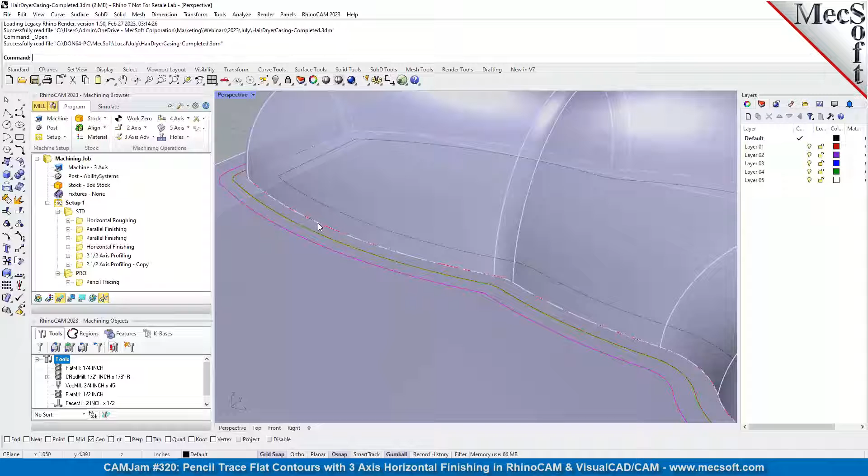What's interesting about this part is that I mentioned that there's going to be a fillet around the perimeter. And if you think about this, the body or the boss of the part, this tangent angle changes all the way around. So you can't just do, like, a profiling around there. That won't get all of the material.

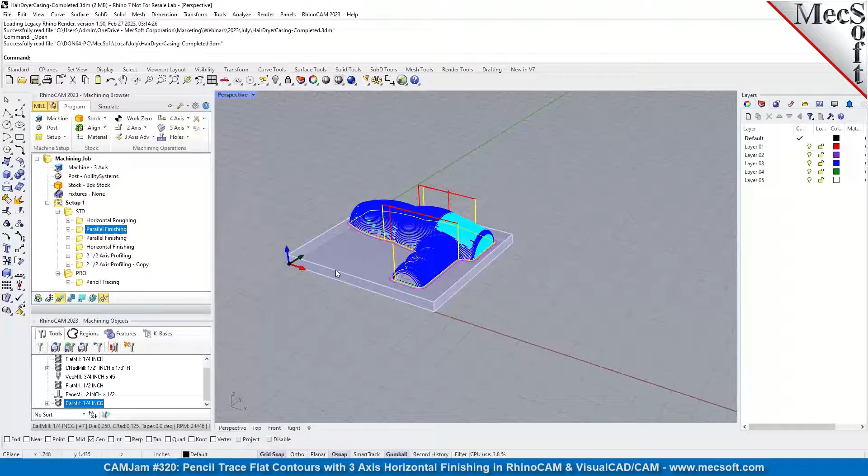And also I want to talk about these different offset values. So for our roughing operation, we just roughed the entire part. But for the parallel finishing, you'll see that we used this first perimeter curve, which is an offset.

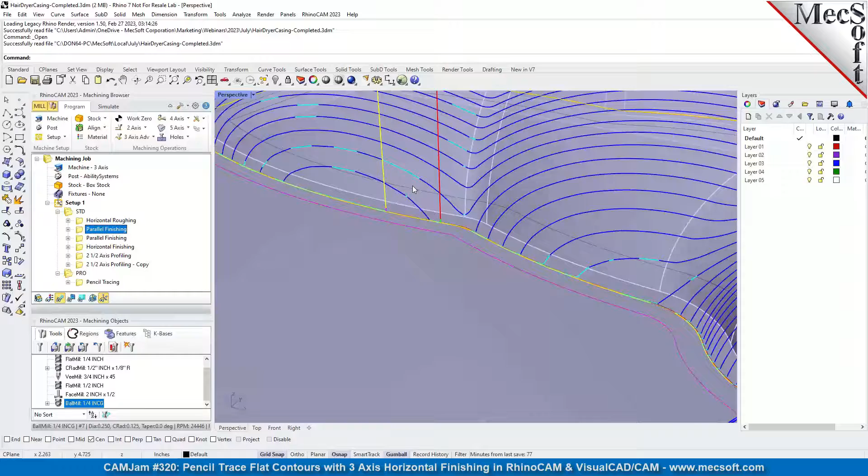Typically, when you're doing finishing and you want to contain it, offset your perimeter curve by 1/2 the tool diameter, which is basically the tool radius, and maybe a little bit more than that, in order to contain that tool path to that area. So we're coming all the way down,

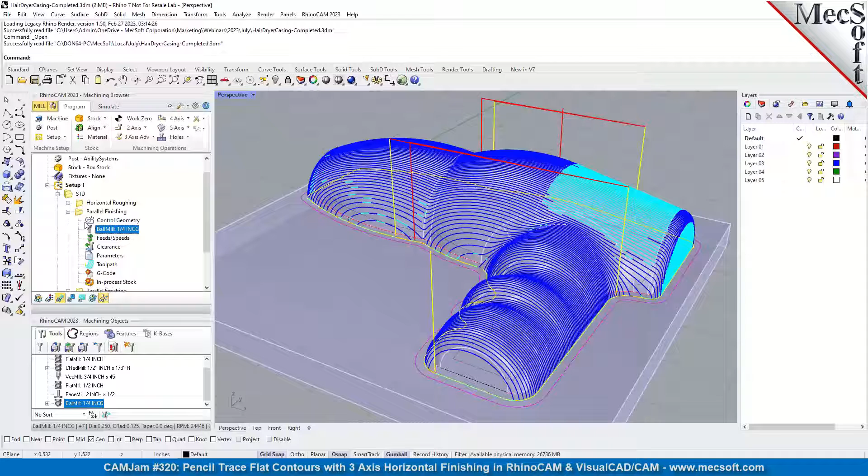and you'll see that the tool, which is a 1/4 inch ball mill, is going to leave a 1/8 inch radius wherever it cuts. So that's the first approach at cutting that radius. We did one going in the X direction, and we did one going in the Y direction.

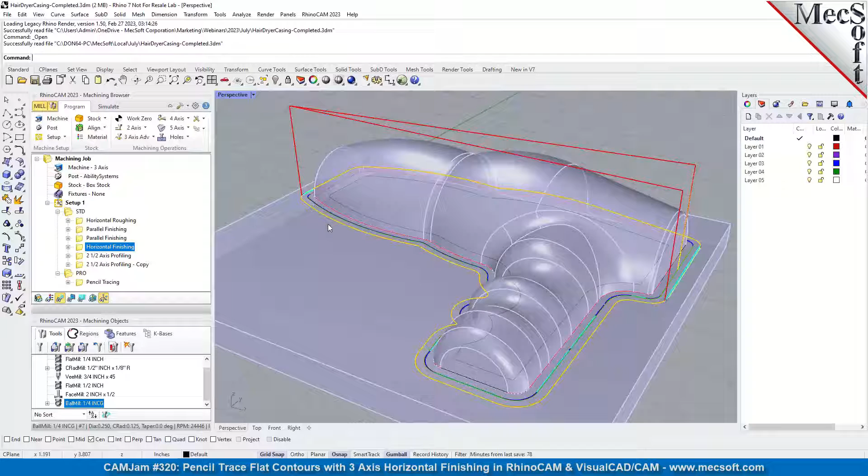Now, one way that you can do, which works well on this only because this is a completely flat area, is you can use horizontal finishing in order to create a path that's very similar to a pencil trace. So what we did, we selected the perimeter curve, okay? And then let's go ahead and look at the cut parameters.

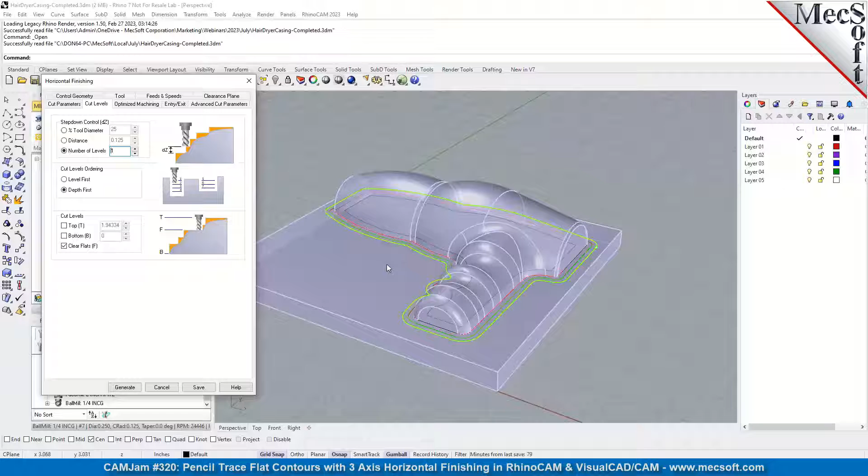All this is standard. The cut levels, we're setting the number of levels to 1, okay? Plus, we're forcing it to do a clear flats, which means it's going to put it right on the flat surface. So if it can only make 1 level and it's got to be on the flat surface, then you're getting the pencil trace, the perfect bitangent tool path around the edge.

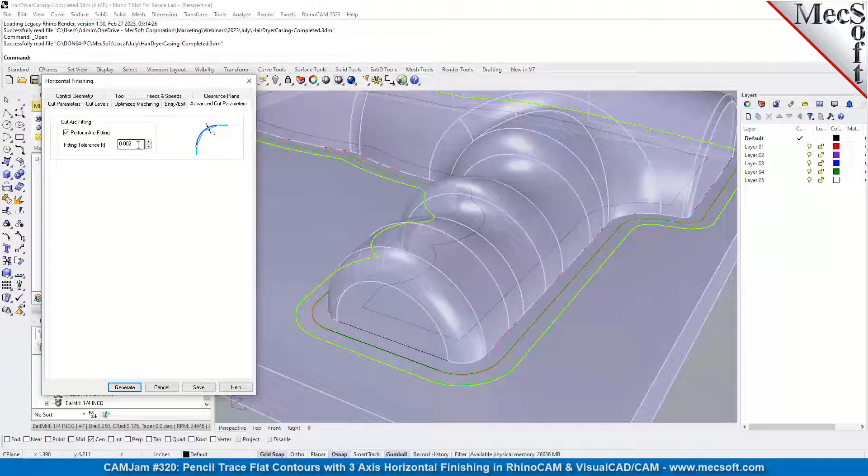And then we also have optimized machining. We don't need that. We don't need any entry and exits. We got arc fitting enabled. Let's go ahead and cancel that, and let's just look at the tool motion.

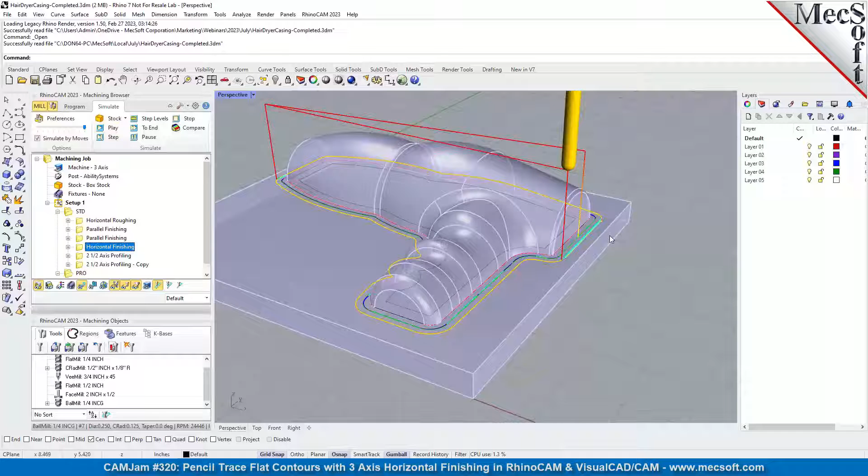Let's just play. We can't get it to do it. A lot of system resources being hogged up. I'm not sure why it's not going through it. So let's go this way.

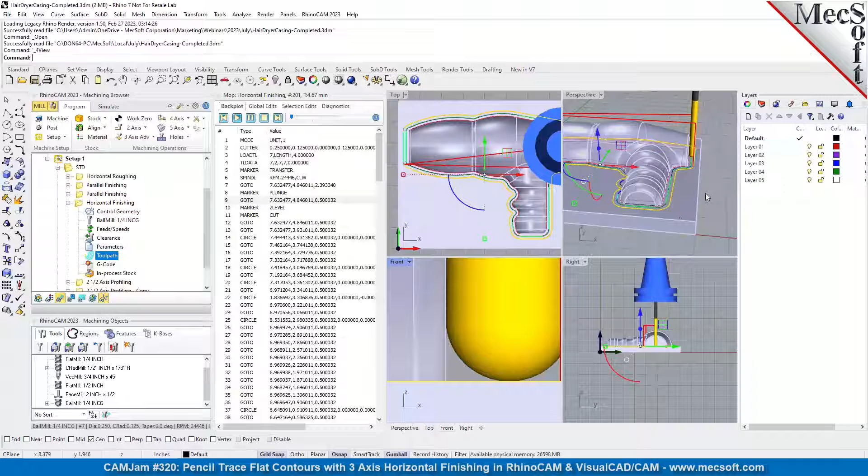So basically, let's go to this view here. Okay. What's going to happen here is it's going to leave your 1/8 inch fillet all around the part. And let's go to another area. Let's keep going around here. You'll see that the tangent changes as it goes around. So we got this bitangent here and here.

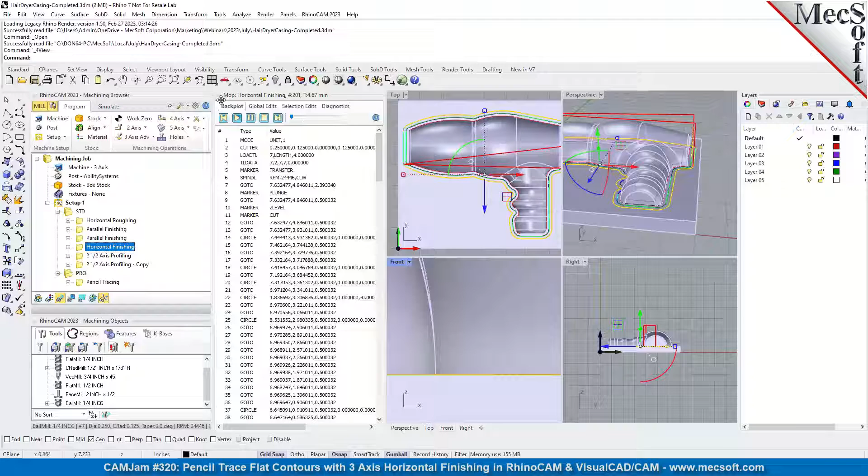So that's a trick you can use if you don't have the Pro and you want to do a pencil trace and you have a flat area. You can just use the horizontal finishing. So what else did we do here? If you need to do any cleanup, we did a profiling, which is a straight profile on these flat areas. And there's another area right there.

And then if you're in the Pro and you want to use the pencil trace, it works very well here as well. It'll calculate that bitangent path all the way around.